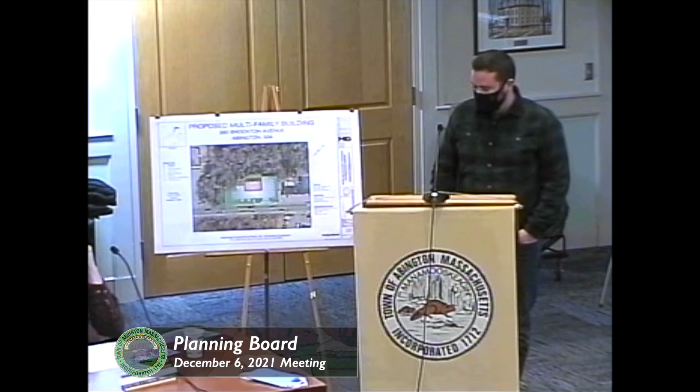We've since gone through the permitting process with conservation. There's an existing depression on the site that there were some questions about the jurisdiction of. It was a jurisdictional wetland, and the Conservation Commission issued an order of conditions. Essentially, one foot off the wetland line will be the limit of work, and we're proposing a retaining wall with a guardrail atop it, two feet off the wetland line. That was a question at the last hearing.

So we waited to get the order of conditions from Conservation and incorporate the peer review letter, and the revised documents addressed comments from conservation as well as the peer review letter. Since that resubmission, we received a recommendation for approval, essentially noting that if any changes come up during the MassDOT access permit, basically the curb cut and utility permits, since we're on Route 123, a MassDOT jurisdictional road, we'd refile with the planning board. I can leave it at that and take any questions, or present similar to what I did last time.

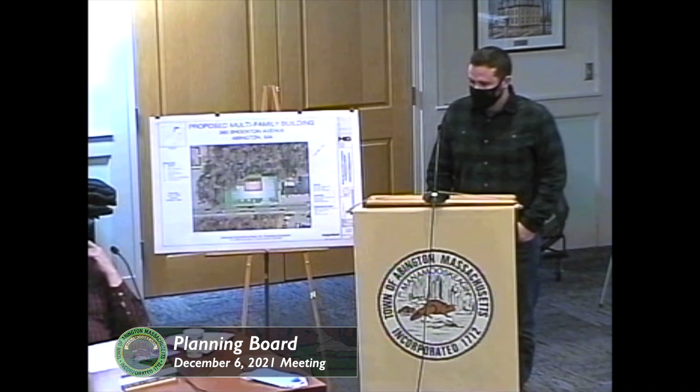Dave? No, as he summarized, we reviewed the revised changes, and they were all made consistent with our original comments from August 31st, 2021. We've recommended that it's ready to be approved, with the one caveat that they return to the planning board if there are any significant changes made as part of the DOT permitting, and any normal conditions of approval that the board has.

We have a couple of letters from the Department of Public Works memorandum. The Abington Sewer Department has reviewed your request for information regarding the planning board hearing scheduled December 6, 2021, and has the following comments: this proposal, located at Assessors Map 15, Lot 138, must be approved by the Board of Sewer Commissioners at a regular scheduled meeting. And from the treasurers, no issues at all.

Are there any comments from the public?

Board members, are you requesting any special permits, waivers, anything? Nope, it's straight site plan review. Correct, site plan review. Essentially we are filing for a special permit from zoning because it is the highway, the HC district, highway commercial. So for the use it's a special permit, and for the site development it was a site plan review. But we're not asking for any variances or waivers. It meets parking, it meets site coverage requirements.

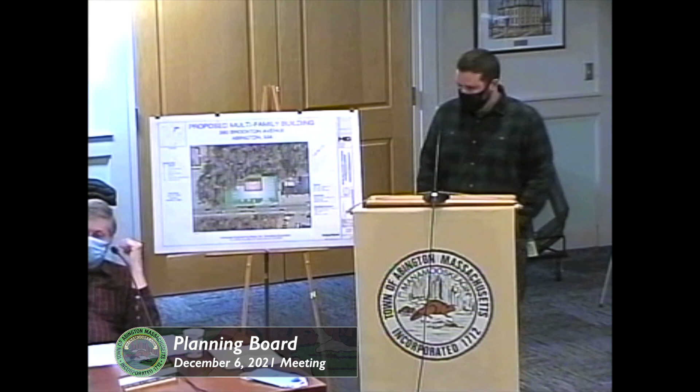I go by there every day and I'm like, okay, yeah, this is where they're gonna build this thing. I just wanted to clarify that.

On the Cleveland pears, we will not allow Cleveland pears or any other type of ornamental pear in the town of Abington, so those trees would have to be replaced. Also, I might suggest they think of something other than boxwood because of the disease coming into boxwood—it might be fine for a year or so and then lose it. The applicant is doing the landscaping work himself, so I'm sure there's no issue with changing that.

Any other questions? Is there someplace indicated how you're lighting up the lot? There are lighting plans we did submit, done by hand. They're wall mounts basically, enough to illuminate the parking lot with down lighting, nothing leaving the lot. It's just residential, not lighting up a commercial space.

Anything further? Guess if someone living there wants pizza, they have a short walk. Yeah, that's a benefit of the location.

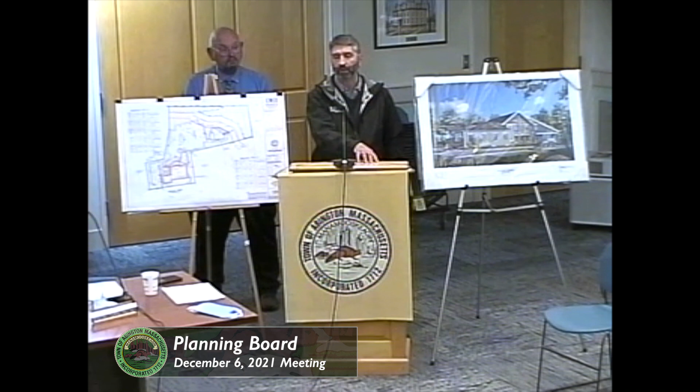By the way, I like the exterior design. This is what I'd like to see more of in the community as we build these buildings out - things that look good, look nice, are functional, and add value to the street. Fortunately, it's not hard to make that building.

Okay, thank you. A couple other questions about the land around it. There's currently a retaining swale or ditch out back. Yes, it's all grown in right now - it had been neglected for a long time. Is it grown in with trees or just brush? That's brushy stuff.

Yeah, so there's something there, but this will just make it bigger and more formal. The vegetation has to be removed, the basin has to be reshaped and given some structure. There'll be a little modification to the forebay, and the outlet control structures will be new.

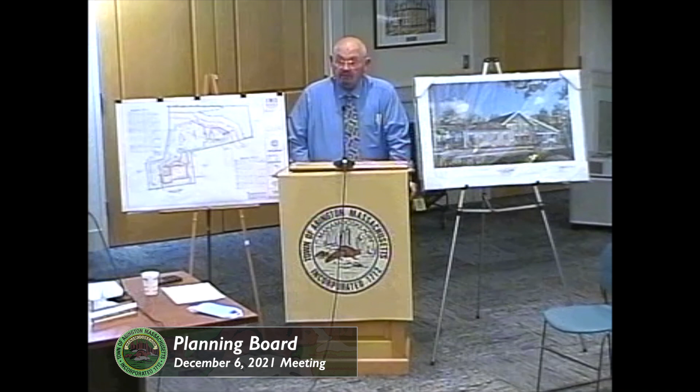How much of the water from the site runs back - all of it, or just some? Is there a crest where some goes to the front and some goes to the back? Let Jude talk to that, if you don't mind. Okay, thank you.

Good evening, I'm Jude Garvin from OHI. Currently, this portion of the property drains down through the avenue where the proposed handicap stalls are, and it flows out onto Bedford Street.

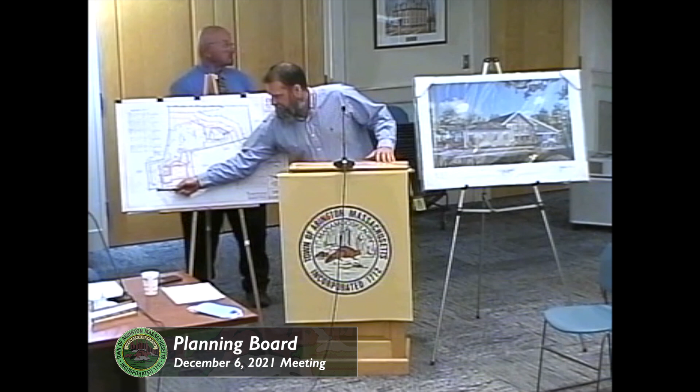The proposal is to take it from the curb cut and push it back towards a catch basin to collect the water in front here that runs down from the street and from the parking area we're rehabilitating. That water will then get piped through a series of drain manholes out to the back retention basin. So it'll end up eventually out to the back retention basin? Correct.

When we went out there, our thought was to have some underground infiltration, some out front and some in the back. So we did a series of test pits along the perimeter and noticed this severely overgrown retention basin - we didn't know it was there at the beginning. We saw the detention basin, went in and redid the topo, and did a test pit in close proximity to it. The reason we didn't test within the basin itself is we didn't want to tear up the bottom of the basin at this point, and maybe we'll wait for construction to do a confirmatory test.

What we did find, and I'll tie this into the hydrologic soil groups - this whole area is mapped as hydrologic soil group D. But when we did the test pits, we found nothing but sand and gravel, which indicates a soil group of A. So when we did our drainage calculations for the existing pavement and building, we used soil group A consistently throughout, based on the soils we actually found out there. We didn't feel we should use a D soil with a slower infiltration rate, which changes the curve numbers even with existing facilities on site. So that's the reason we used the A soil.

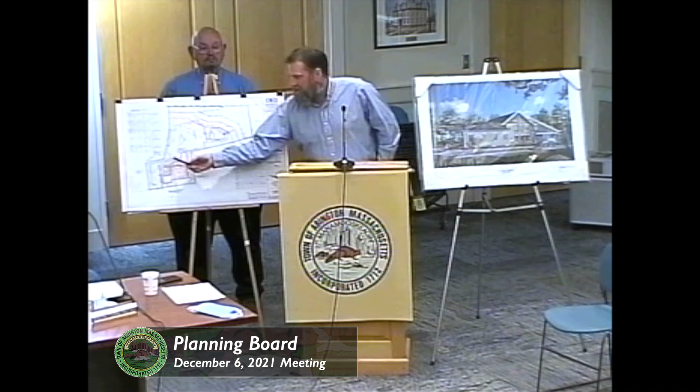Even though it's clean coming off the roof, it is going to get onto the pavement and mix with the other contaminants. Usually you want them separated, but in this case it just made sense to put it all in the low point of the site and oversize the basins.

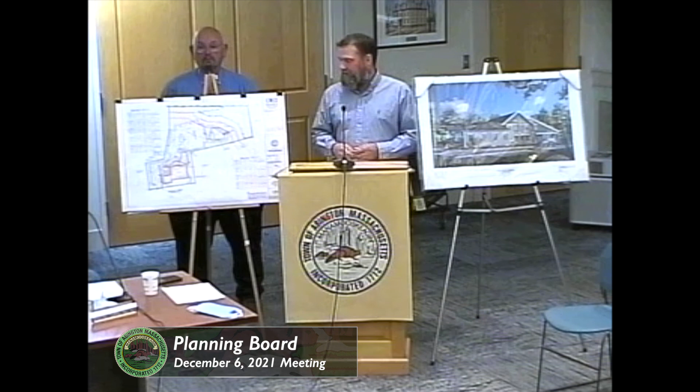Do you need 62 spaces? Is this going to be that busy of a dental office where we're going to need 62 spaces? I don't even know how many dentists and chairs will be on the property. I'm just, if you kind of went by the calculation that's in there, I understand that, but I mean.

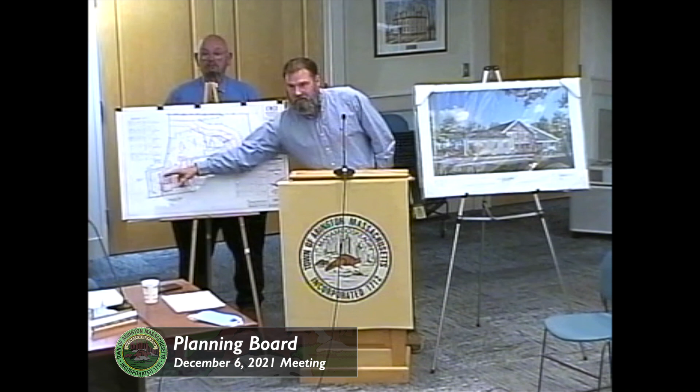We looked at the floor space and the reworking from the architect, and we looked at all that, and then we produced the square footage, and then we just applied that square footage to the documentation. I do know now that the proposed owner of this does have some overflow parking over here now because their business is kitty corner across the street. So there is quite a significant amount of traffic load, so we felt the 62 spaces were right in line with what we need.

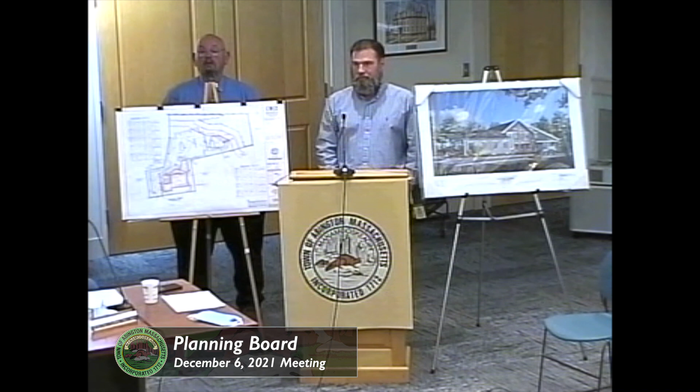We also have the vagueness of not knowing who the other tenant's going to be. So it's always better to be prepared.

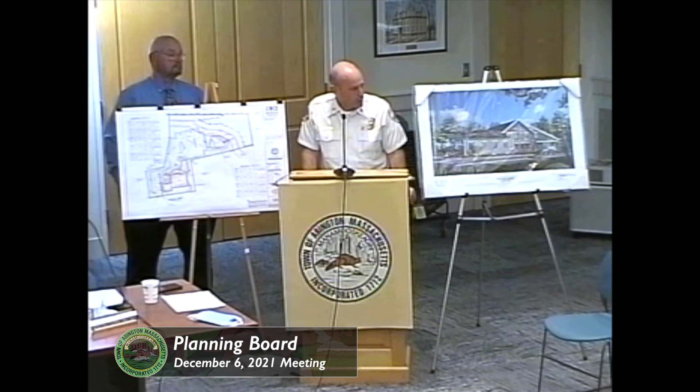One last note for the architects to know the history of the building: we did have a freeze a couple years ago affecting portions of the existing sprinkler system. So when you remodel this, you'll want to go through it with a fine-tooth comb. It has been repaired, however. It was an unoccupied building, and it was repaired fairly quickly by a licensed contractor, but you're going to want to go through that carefully. Our fire protection engineers noted the same thing. Excellent, good, thank you.

Anything further? Would you like to continue this to our January meeting? Yes, I would. January 10th. So we need a motion to continue the hearing to January 10th. Motion made, seconded, and all those in favor? Aye. And if you could just give us a letter on it. Can I just email it to you? Yes, just shoot me an email tomorrow saying you agree to continue it. Thank you very much. And then, Dave, when would you need those plans?

We have to get it out on Thursday. Are you the gentleman from Norwood? Yep. I'll tell you, in this day and age it's refreshing to get peer review comments that quickly in time for a hearing, because it doesn't usually happen. Well, it was this morning, but at least it came. That's all right, so if you could get it to me Monday or Tuesday before the meeting. Sure, because I have to get to January 10th. Liz, for Thursday or Friday.

Thank you. I do have something I could give you now regarding the traffic. We did have a traffic engineer look at the site and generate some numbers for what he thought the site would generate. Have you touched base with them? Well, as you know, we cannot approach Mass DOT until we have an approved project in hand. They will not hear us, you're wasting their time until we get it approved.

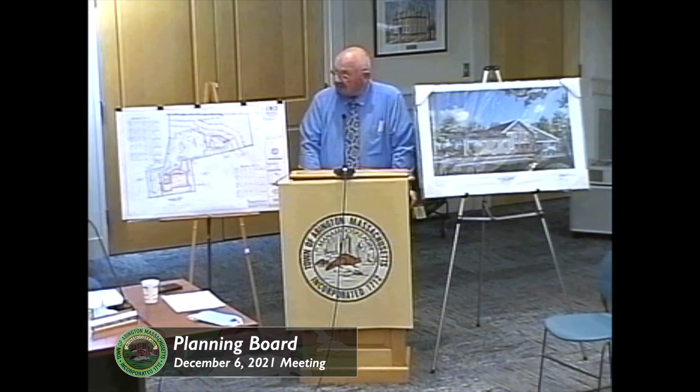Sometimes they do this. Well, they've been so understaffed, or there's just not much staff there anymore. Matter of fact, I'm not even sure the office is open to the public, or if you're still operating from home. Yeah, most of the state agencies are still like that. Folks, thank you very much. Thank you, thank you.

The Abington Planning Board will hold a public hearing on Monday, December 6, 2021, at Abington Town Hall, 500 Gliniewicz Way, at 6:30 p.m. on the definitive subdivision plan application entitled Definitive Subdivision Plan for Roslyn Street, prepared for Abington Investment LLC by Strong Point Engineering Group, 340 Manley Street, Unit 2, West Bridgewater, Mass. 02379. The plan is dated November 12, 2021. The property is owned by Abington Investment LLC, 245 Central Street, Abington, Mass. 02351. The property is located on Assessor's Map 61, Lot 7. The hearing will be held at Abington Town Hall, 500 Gliniewicz Way. Plans may be viewed at the office of the Town Clerk at Abington Town Hall, Monday through Thursday, 8:30 a.m. to 4:30 p.m., Friday 8:30 a.m. to 12:15 p.m. Wayne P. Smith, Chairman. Advertised in the Brockton Enterprise on November 22nd and November 29th.

Thank you, Mr. Chairman. For the record, my name is Attorney John Bradley, 500 Washington Street in Abington Center, here representing Abington Investments LLC, the owner of the property formerly known as 286 Spruce Street. Just as background, I think the board is very familiar with this property. This is the same property that this board approved a 7-unit townhouse condominium project on a number of months ago. From that approved site plan, we went to the zoning board for the special permit for the multifamily use. There was discussion about the number of units, the density, and concerns voiced by some of the neighbors. The zoning board eventually did not approve the special permit. We have appealed that denial through the courts. It's pending; we expect it to take a little while to go through.

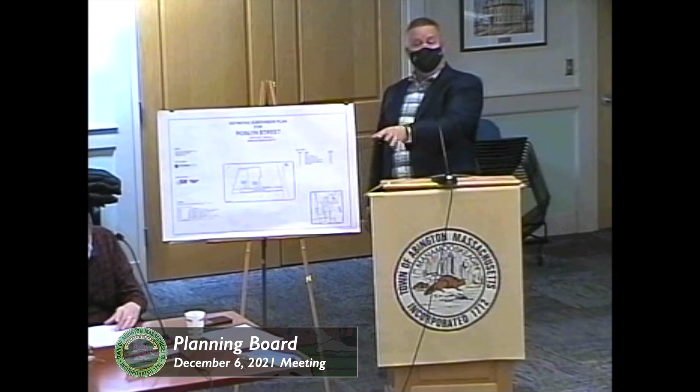As we're all aware, there is a paper street, Roslyn Street, that's been there since the beginning of time. Anyone who owns land on the side of Roslyn Street has a right to develop it to a sufficient extent to allow for building permits to be issued for homes or condominiums or whatever is going to be out there. We are proposing 2 single-family homes. There would also be a single-family home up on the street near where the original house was. That is not part of this subdivision, that's its own standalone lot.

We are proposing the 22-foot wide paved roadway, which is the minimum typically required and requested by the fire department. We have submitted a list of waivers that try to make this as minimal impact as possible and basically make it look as much as a driveway as possible. A typical roadway would require a sidewalk on each side and granite curbing throughout the length of the road on both sides. We've asked that the sidewalks be waived because we only have 2 houses here, and that there's no need for granite curbing. There isn't any granite curbing in the Muster Field that I can recall.

So this would kind of fit into the nature and style of the neighborhood. We have a Cape Cod berm on the left side as you drive in, designed by Strong Point Engineering, so that any water that hits the private road would shed towards our house lots, across the pavement, and into what they call the country drain system, a swale along the side of the road, be absorbed along the side in the swale designed by Strong Point. Forgive me, I didn't introduce Stephanie Hoban, an engineer with Strong Point Engineering, who'll be here to answer any questions that are above my pay grade.

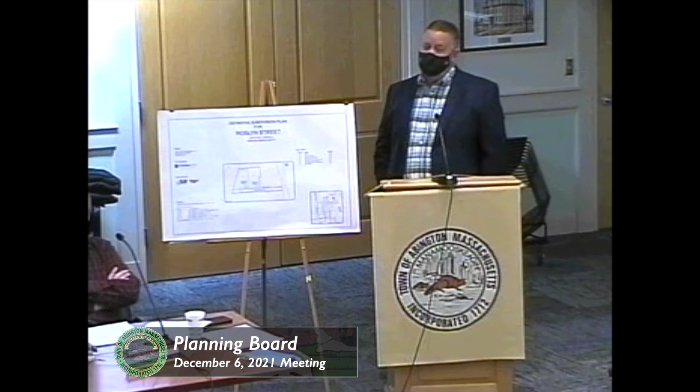It's a relatively straightforward design. Again, we tried to simplify it as much as possible. I know Norwood Engineering has reviewed it, and perhaps, Mr. Chairman, it's better if I pass the baton to your engineer and let him review it, and if there are any follow-ups you'd like us, myself, the engineer, or the developer to do, we'd be more than happy to answer any questions.

In terms of the utilities to this site, Sean has pretty summarized some of my comments. The plans originally called for 2 two-inch lines, and he's clarified with the water department that it is to be 1 two-inch line to provide service to both developments. One question we had that can be answered now with the fire department is whether they want any kind of hydrant or fire protection at the end of the private way.

The owner came and met with myself and my fire prevention staff a couple weeks ago. I believe there is a hydrant well within 500 feet of this. I don't think it's on here, but I think it was within a couple hundred feet from the private road going down, so the houses do meet that. I think it's within 500 or 600 feet, about 100 feet down the street. Very good, thank you.

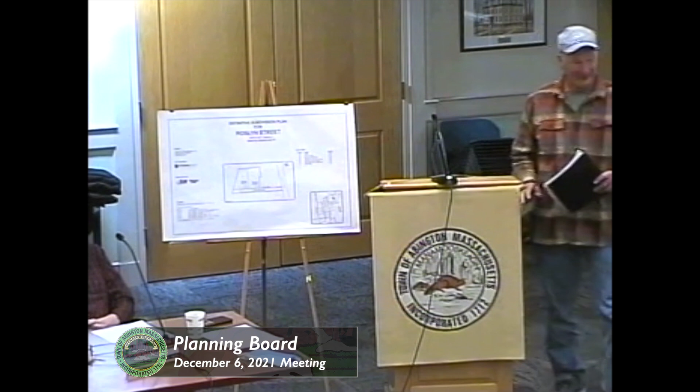Again, Sean Riley and Stephanie, if I misspeak, please let me know. Mr. Keating, it's an oddity in state law. We can't really put your name on it, and you're right, there is no deed for Roslyn Street if you look at the registry of deeds. There is a statute, however, that says when a road is put on a plan, the owners of the land on each side of the road own to the fee. That's why you were talking about 17 feet, which is half of the 34. So they own to the center, but the entire roadway is subject to the rights of those lot owners to use the entire roadway. So if we weren't doing anything, you would have a right to come in here and ask to put a road, to pave, to put utilities down Roslyn Street and do with it what you may.

And you can use the whole 34 feet. LaPointe is doing that, but we're only paving 22 feet, because again, we want to minimize the amount of pavement. I believe on what's called the left side, the Keating side, the edge of pavement is 5 to 7 feet off on each side. 34 total, 22 of pavement. Cape Cod berm along the left. It's at least 5, I know that.

So if they approve this subdivision plan, we don't become the owners of Roslyn Street, nor do you. The statute still sits there. We have the right to develop it.

But my name was on the last Roslyn Street. I'm not familiar with whatever. Oh, you put it on. Is it the one that, when this had to be, it was a single-family lot 20 years ago, when Jim April owned the house up front? Yeah. You got it approved through the planning board, but my name was on there that I had use of Roslyn Street. I honestly don't recall. I don't say you're lying, I just don't recall this.

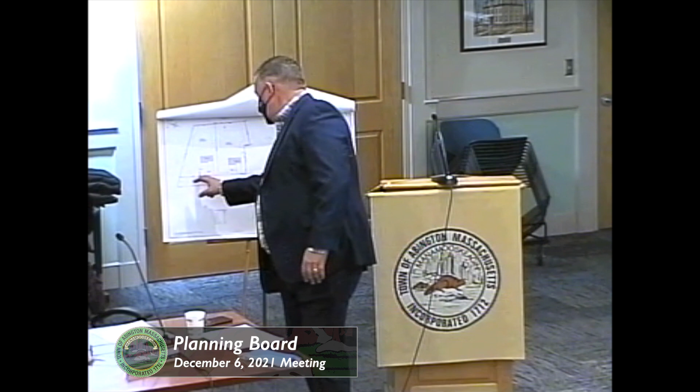Right here, we measure the frontage along the edge of Roslyn Street, the 34 foot layout, not the 22 foot pavement, but the layout. So this is a 101-foot wide lot. This one is, more than 100 anyhow, 145 feet wide.

But that's not a no man's land of 34 feet wide. There's title that goes halfway in between that strip.

If you think of it, if you own a field, one owner of the field, and I'm going to build a subdivision, I have to draw the street out, and I draw the lots out. Back in the day, you would then sell lot 1, 2, 3, and 4, and when I was done, the town would accept the road, and when the town accepted the road, it became a public road. But if the town didn't accept the road, it still remains private, originally owned by the former farm owner, let's call it.

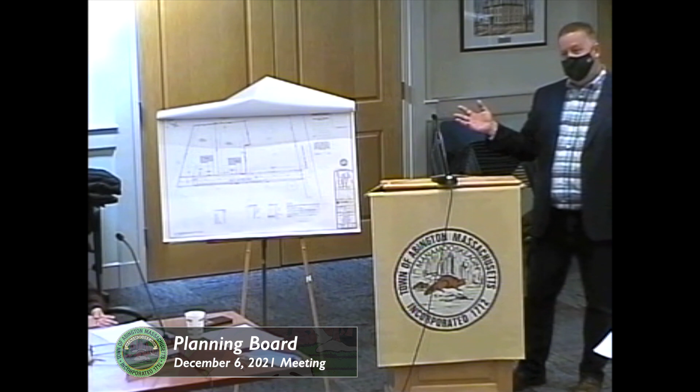But he's gone, he sold all the lots, so the statute says unless that landowner put language in his deed specifically reserving ownership of the roadway, the lot owners along the road each own halfway to the center line of the road in front of their lot, subject to the rights of all lot owners to develop, to use it, to bring utilities, to put down pavement, whatever they'd like to use.

Is it right to say easement, right of way? What is the proper term, the paper street? It's really a paper street, or it's more inclined to be better described as a right-of-way than as an easement. The right-of-way is pretty much all-encompassing, the statute allows them to use it for access, for utilities, whatever amount.

So it's 34 feet wide, the proposed actual paved surface is 22 feet wide. Is that centered in the middle? It is centered, so 34 minus 22 is 12, roughly 6 feet on each side. So he owns technically to the, yeah, right down the middle.

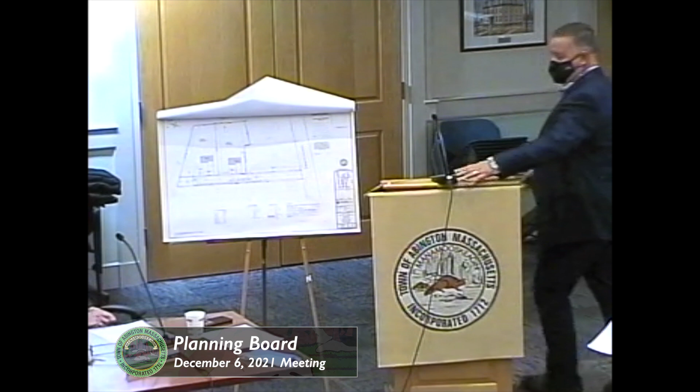So is there a reason why he wouldn't have access to it, Mr. Keating? He has the right to go up and down it. If he wanted to extend it in the future, he has the right to do that, but he'd have to come to you to do any sort of upgrades to it.

Thank you. Any other questions? Yes, ma'am. Good evening, Brianna O'Connor, my husband Tim. We live at 278 Spruce Street.

Same issue, we own half rights to 17 feet. What if I wanted to build on that? You could, but he's going to build a road. So come down the road.

Why do I have to give up my rights to that half? We've had it before the board in a different respect. We've had people that want to build, want to subdivide lots on their side of the street, and the people on the other side of the street don't want to do that, don't want to pay for the road. If you want to have a road go by your lots so you can have access to it, you have to pay for it, even though the people on the other side of the road get the benefit of the road.

So we have rights to the middle, the 17 feet, just like Mr. Keating does. As of right now, my husband and I take care of that area, up until Mr. Keating's area where he takes care of it. But we were told, we went through a zoning board, planning board for an addition on our house, and we were informed that we didn't think anybody could build anything on that road.

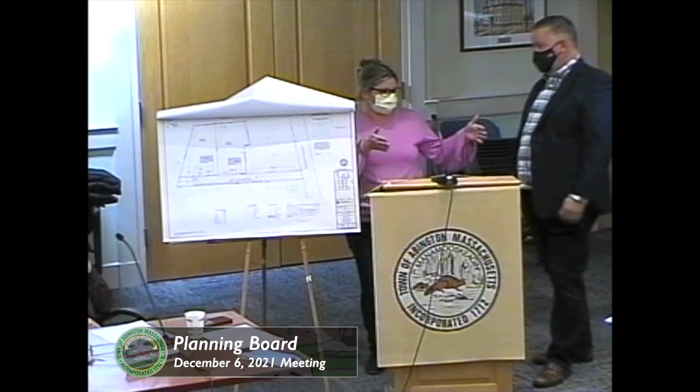Anytime you go over the line onto that paper street, they'd say, oh, you can't do that. Is there a reason why we can't move the road more onto his side of the easement, the paper road, or whatever you want to call it? Move it over slightly so we still have that 17 feet of our ownership of that paper road?

First of all, like you said, nobody really owns it, kind of, right? Yeah, exactly, that's the problem, it's a misnomer.

But why does Mr. Lapointe, or whoever's building the street there, get to do that if maybe in 10 years I wanted to do that?

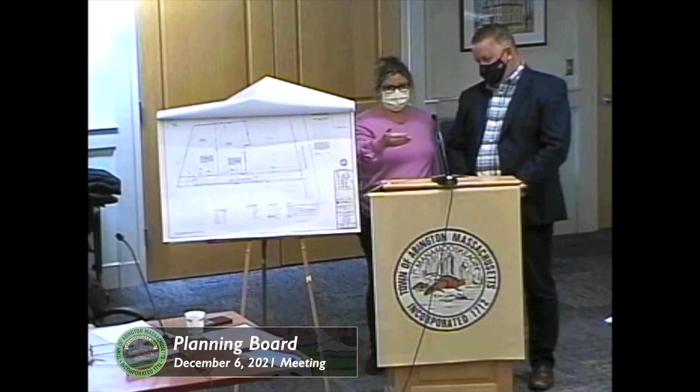If I could add an example, we've had people that have built roads like this. Let's say you decide, I'm gonna subdivide my property, put 2 more houses on it. There's a good chance that we're going to require you to build a full-size road, which means whatever work they did, it'd be your responsibility to build a brand-new road going up there, do the cul-de-sac, whatever is needed.

But it's still, you can't build within the road. Nothing can be built within the road because it has to be... So I guess my real concern is, can't we move the road over to more onto his 17 feet than our 17 feet? So you basically keep that green space? Yes, more of the green space.

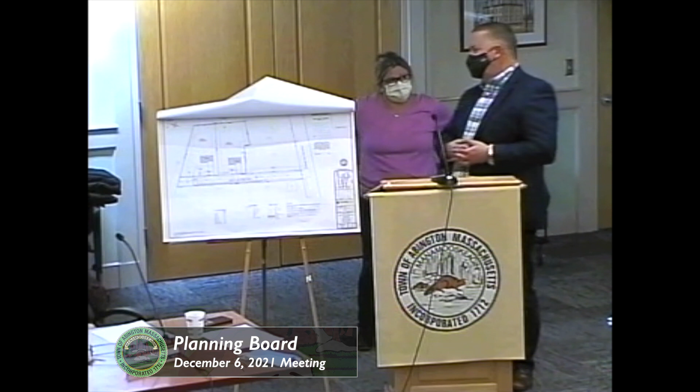I'd have to look at the engineering. Part of it is we have the swale along the road. We've designed it so any water that hits it flows away from you. So we have this open country swale, a grass ditch, a small ditch, where April's house used to be. It goes along the far side of the road.

I don't know if we can move it much more, because honestly we intentionally did some of the design in case Mr. Keating, or in this case the O'Connors, wanted to extend the road in the future. I don't know what Mr. Keating's plans are. He didn't want us building much out there, but if in the future he sells his property and decides to extend the road, you own what, 2 or 3 acres out there? I own enough for 7 lots. Okay, but that's subject to the 600-foot restrictions.

He could probably loop a road around out his driveway sometime in the future. If he were to do that, I'm not holding this board to anything, but at that point he might be required to upgrade the street to put in a sidewalk now. So we left 5 feet to the left, so we're not blocking that from happening, but we're not paying for it either. That's why we went right down the middle of the road.

So is there a way that if you guys didn't put it right down the middle, we could get trees or something to have that privacy from that road, from that driveway?

You have been more than cooperative throughout this process, and I think Mr. Lapointe, who's sitting right there, will be more than willing to talk to you about anything we can make work. As you know, we didn't want to do this, we wanted to move it over, and we had it all landscaped, and we talked about this. So if there's something we can do, it doesn't even have to be from the board. Maybe after everything's in and you look at it, you see, I'd like a tree right here, or 3.

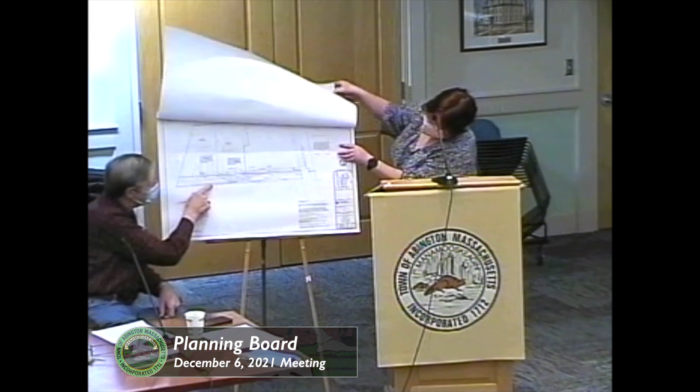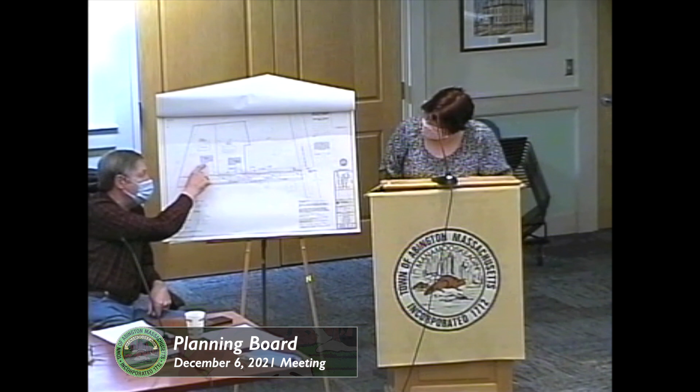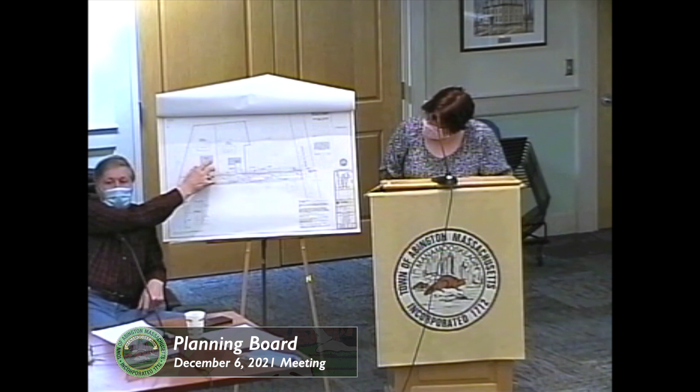So what's happening is this road is cross-sloped, so water that falls here goes in this direction. You can see the contours. It's discharged into the grass swale. There are pipes underneath each driveway. Water goes under the driveway, continues in the swale, goes under the driveway, continues in the swale. Two of our comments were to require roof infiltration systems, roof drains, dry wells, whatever you want to call them, on each lot to minimize the amount of water coming into the swale.

And also deal with recharge of runoff. We also suggested that a structure be placed here at the bottom of the swale, so in large, intense storm events, there's a connection to the groundwater, so that you don't have ponding, or it allows water to continually drain into the ground over a period of time. So that, and topographically,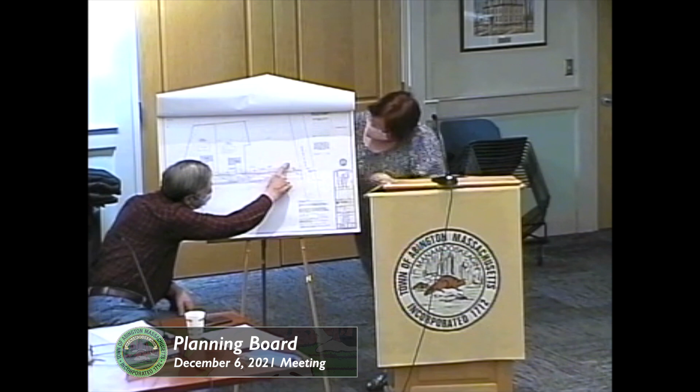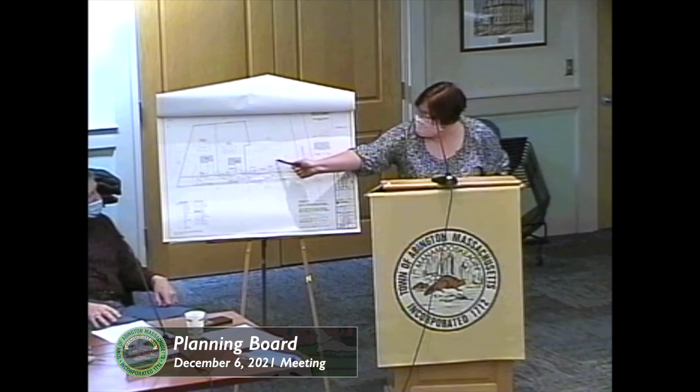Maybe you can read the contours. It's 139. 139 is here, and this is where 139 is. None of the runoff from the street should exit the swale. The way it's graded, yes, this existing lot will still continue to drain towards the low point over here, but nothing from the swale should be able to get over that way.

Okay, and David, you're obviously okay with the drainage as it's presented? Okay.

We have a couple of letters. One is from the Sewer Department, has reviewed your request for information regarding the planning board hearing scheduled December 6, 2021, and has the following comments. Roslyn Street, this proposal located on Assessors Map 61, Lot 7, must be approved by the Board of Sewer Commissioners at a regularly scheduled meeting, but as they've expressed, they're going to have a septic system.

The other one is from the Joint Waterworks. The Abington Rockland Joint Waterworks has reviewed the plans of Roslyn Street and approves of a 2-inch type K copper line to feed 2 proposed single-family homes. The water for this project was originally approved at our March 16, 2021 meeting for 7 housing units.

Any other comments from the public? For the board?

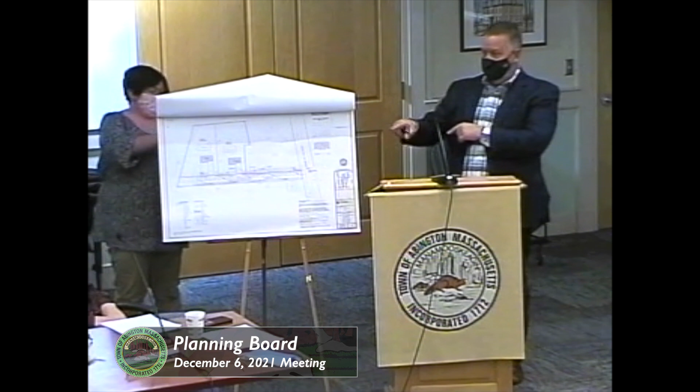Someone buys the property and doesn't realize it. Right, you're going to have to record this plan. Yes, for the layout plan we have to record. We wouldn't record all the detail sheets, we record the layout sheet. So we will submit, based on your vote tonight, an updated plan to address some of those technical details for final review, right?

I suspect in the coming years we're going to be seeing more of these types of requests as land becomes increasingly scarce. I think it's worth noting that this approval is based on the very specific situation that they presented here, the specific solutions and the requests. That this isn't a standard form that we automatically approve, that this is very specific to this project. That's correct. Technically, things could change if something happens out back, so.

Yeah, so that, I made that motion. Anything further? All those in favor say aye. Aye. Unanimous. Thank you for your time.

All right, just as a quick note up front, I've been receiving emails from Blue Wave, and they wanted to know what we had for zoning bylaws regarding this, and I explained we didn't have anything on the books. So that's another agenda item for tonight, to see if you want me to pursue with town counsel, language for a zoning bylaw to be done this spring.